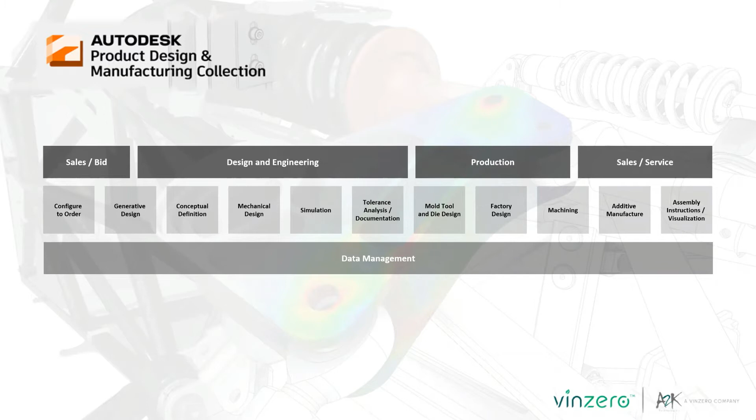So the collection that we're talking about today is what we call the Product Design Manufacturing Collection. And it includes all the tools that you need to develop your ideas, to simulate them and make sure that they work together, to analyze dimensional tolerances, to create CAM toolpaths and strategies, and factory layout options for optimizing throughput, and all the data for all those tools that are used to store and manage that in a secure project. So Autodesk has a whole bunch of tools that fit into this sector, and it's my pleasure to give you some information on each of those today.

So we've got, like we said, areas where we can simulate and analyze dimensional tolerances, things like nesting and CAM functionality. We can also talk for a moment today about factory layouts and some of the things with creating an efficient factory. But best of all with these particular tools is that they're all included in the one collection of products. And we've got quite a list of software that's included here.

Obviously, most of you would be aware that Inventor is the key product of this space, but that also matches into a bunch of other Autodesk applications that link with Inventor to give us some very high-end information and data on the various aspects of working with the Autodesk solutions in the product and manufacturing space.

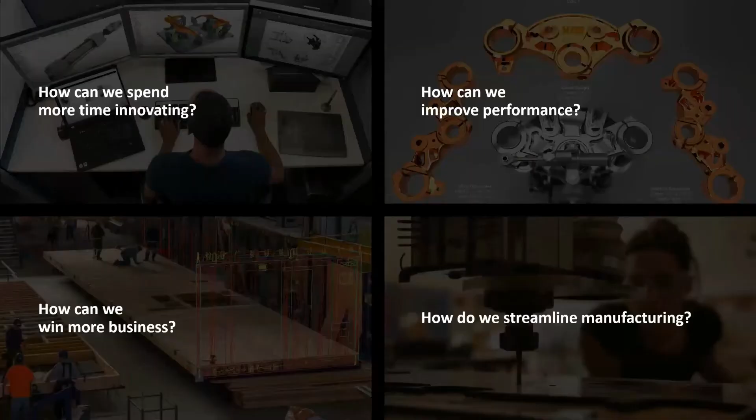So in those capabilities, we can certainly see many applications that are available to us that help us be more innovative. We can win more projects and business. We can streamline manufacturing. We can improve our overall product performance. And we're going to show you today during the presentation some of the reasons why and how we can achieve that.

So first, in regard to your design solutions, we've got a number of options here for when we start out with Inventor. And as you would probably be aware, the general capabilities of Inventor are quite well known, and we certainly run webinars and training on the Inventor product quite frequently here at Vinzero. So I'm going to just quickly brush over a couple of points before we dive into some other elements of the Autodesk Product Design Manufacturing Collection for today's webinar.

So with regard to Inventor, and I'm sure many of you would be aware of a lot of what Inventor does, but it certainly enables the designer, maybe yourself or the engineer, to focus on the design, less on how to use feature controls, but more on the concepts and the power of the design that you've got. So because we're going to find specialized modeling tools, we can speed up our design and integrate things like sheet metal tools into our product design. And those are, of course, available for us as a feature of the Inventor default system. These are not extra add-ons that you're having to purchase.

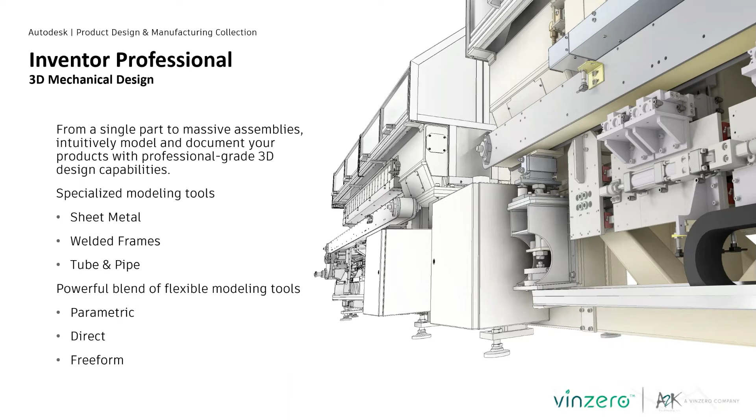Another very powerful aspect of Inventor is what we call iLogic. iLogic is a very, very powerful system where we can set up rules which control the way that our design is going to behave. It's a very interesting and powerful system to allow us to reduce repetitive tasks. We can obviously make minor changes, or major changes for that matter, to our design to create items that are directed by certain parameters, and we can then build that in.

In Inventor 2023, we've seen a number of nice little enhancements to this area, where we can save out our rules to a menu system and make good use of them. So even for generating quotes and things like that, if you've got a conveyor system, as you can see there on screen, we can very quickly animate or sequence that conveyor system up, and we're able to get our data out more quickly from our design and apply a rule to that particular system.

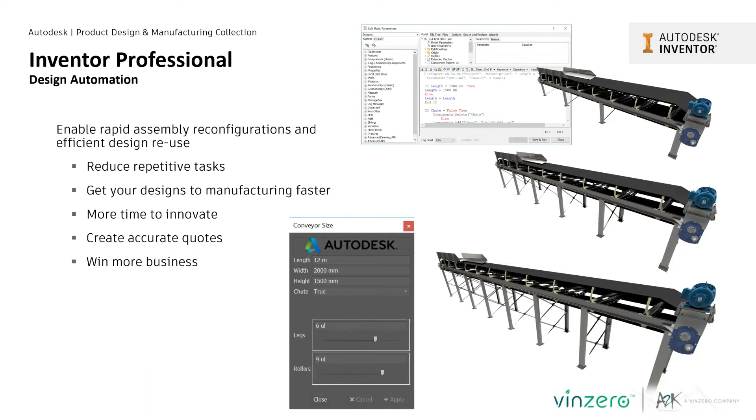One of the other things Autodesk have included over the last number of years is, in the interoperability situation, obviously working with data from other CAD systems. This has always been a hurdle for many companies. If you talk to any engineer, when it comes to sharing information from one CAD system to another, we lose all sorts of information. But nowadays, Autodesk have created a part of Inventor software called AnyCAD, which is a very, very powerful little tool that basically reads in data from a range of different CAD systems and gives us the option to be able to work with multiple CAD systems, even being able to maintain an associative link to, for instance, a CATIA design or a design from another system.

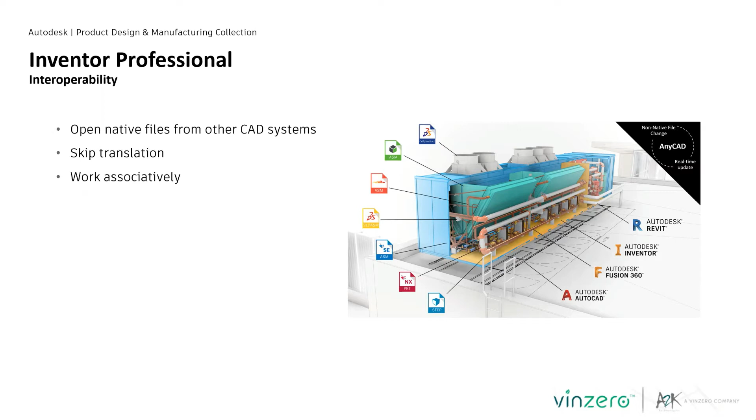So if we update the native CATIA design, Inventor can react to that and obviously allow us to see that update progress through the system. So quite a powerful little tool worth exploring is the AnyCAD functionality. Basically, as soon as you open any one of these models from another CAD vendor, you'll get prompts as to what you would like to include inside of your design functionality.

Something else that's grown quite a lot over the last number of releases is what we call BIM interoperability. This is a very powerful part of the Inventor space, allowing us to interact with other elements of software, specifically and particularly for those people who are in the architectural space using Autodesk Revit. Very, very powerful functionality now to be able to collaborate with architects and to allow those custom options and items to be inserted into a building design, and we can then use those quite easily to create and export out of Inventor as an IFC or an RFA file for use within the Revit space.

So we can quite quickly simplify the model. Obviously, as you'd be aware, an architect probably isn't really concerned about what's inside the air conditioning system, as you can see on screen there. All he's really interested in is the details, maybe the vent outlet, inlet positions, etc., where the services connect in.

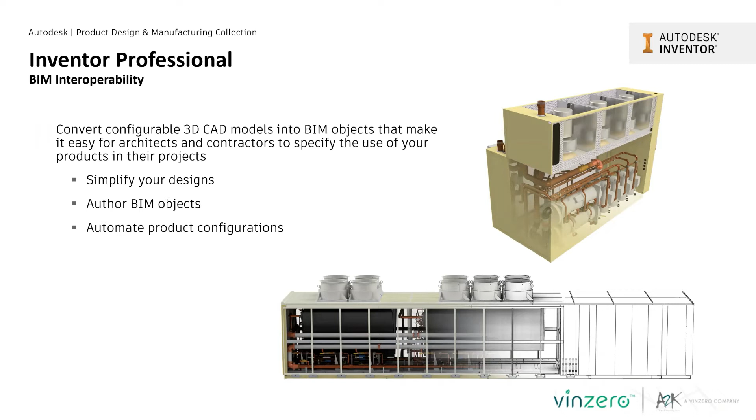But in Inventor, we obviously would have all of the manufacturing details, so we can simplify or dumb down our model. These can be used quite cleverly within the Inventor and Revit space in that fashion.

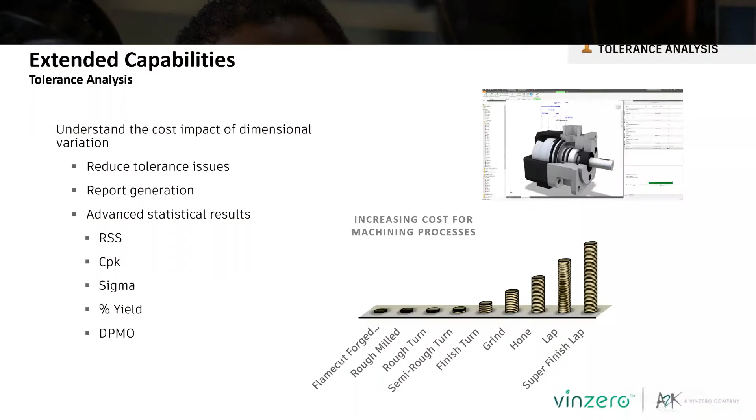So yeah, quite a handy functionality that we're seeing a lot more development on. Let's talk about some of the integrated tools. Again, all of these tools are part of the Product Design Manufacturing Collection, which we call extended capabilities of the Inventor tool. First up, I'd like to talk to you a little bit about tolerance analysis.

Now, for anybody that's been involved in the manufacturing space, you'd be well aware of the extra cost involved in creating, for instance, a super finished lapped part compared with something that's flame cut. There are extra manufacturing processes that need to take place, and that will impact on the cost and quality of your design. So the big question is, how much time and money are we spending unnecessarily creating high quality finishes when maybe the customer isn't really needing that particular functionality?

So really the purpose of the tolerance analysis tool is to show where we need to have high tolerance items, and we can stack those tolerances up and analyze all of that within our 3D model space to consider best fit, function, and form. We've got quite an important aspect here, and I'll come back to this one and talk a little more on it in a later slide as we work through today's presentation.

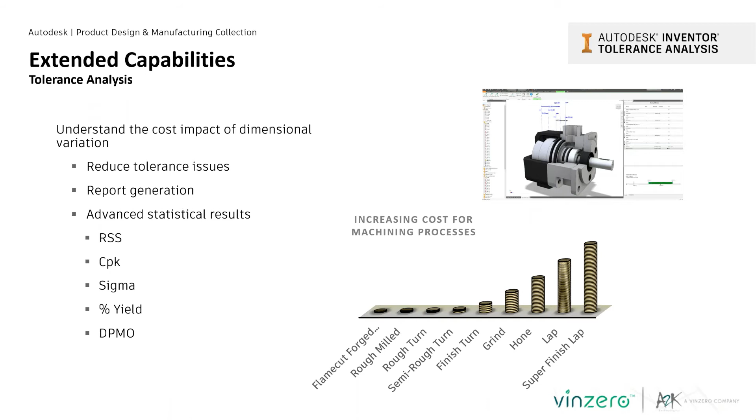With regard to factory layouts, this is another aspect of the Product Design Manufacturing Collection that links into Inventor. We have done webinars on this particular subject specifically, and if you're interested in this aspect of factory design, it's certainly worth having a look at those particular webinars. I'll explain a little later on where you can get access to those.

Basically with the factory design tool, we've got an option where we can bring in from a very large library of standard components. So things like conveyors and basically anything for product movement, we can save out and create an asset library which lives inside of the Inventor system, and we can simply pull in conveyors and product movement modules to allow us to set up basically a map of where our part is going to travel through a production type scenario. Then we can analyze the physical aspects of that and the associated costs of each of those production scenarios. So there's quite a lot of benefit in doing this.

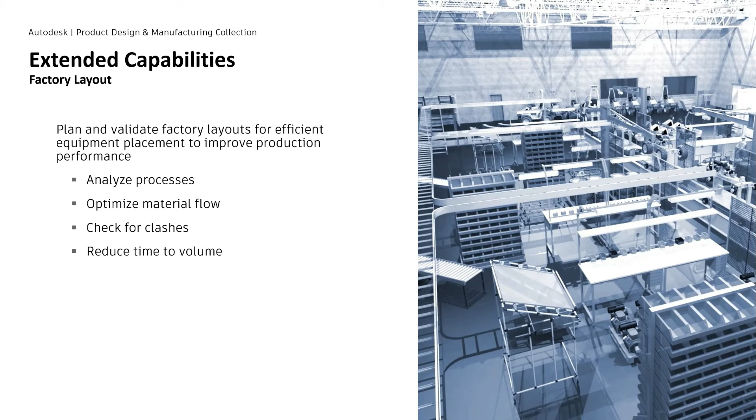Certainly having a great design, we need to be able to produce that part and have it come through a production environment, and we can do some further analysis on that within the Inventor factory layout or factory design utility.

We've also got options for things like stress analysis, and most of you would be aware that many of today's 3D CAD packages include some sort of entry-level FEA, finite element analysis tools, and lots of people use these, which is great. But every license of Inventor Professional has a standard stress analysis for standard stress and frequency studies. Also within that, if we have the Product Design Manufacturing Collection, you get access to what's called Autodesk Inventor Nastran.

And that offers a more complete set of simulation studies, so we can do nonlinear, thermal, fatigue, and dynamic studies. They all offer a complete understanding of your product performance and the accurate results that you need from that particular product. Really what makes them so powerful is that all of the calculations here are using the Nastran solver, which if you know anything about FEA, is quite a powerful solver that is owned by Autodesk.

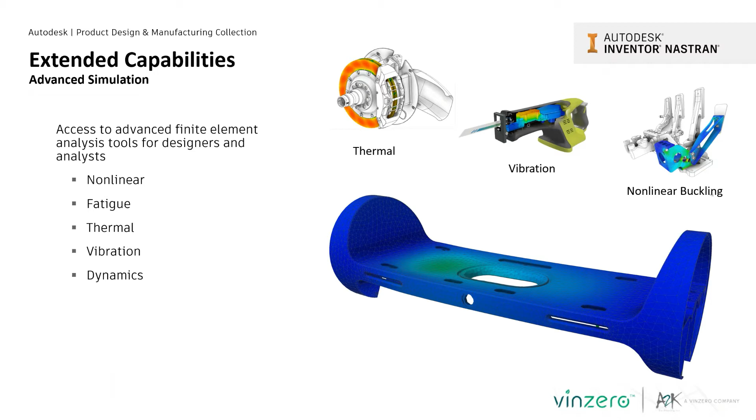Another really powerful part of the Product Design Manufacturing Collection is what we call Inventor CAM. This is an area that I've been quite involved with over the years, and it provides for us a seamless workflow from design through to manufacture. Because it's integrated into Inventor, it means that the changes that you make to your Inventor model will reflect instantly in your toolpath and CAM processes.

Now, this has always been a challenge for people using CAM software, in that when a change is made to the parent model, generally they would have to re-import the parent model and go through and reprocess their CAM toolpaths. With Inventor, it simply pops up with a little message box saying your model has changed, would you like the toolpath to reflect that change? If you pick yes, the system goes off and rebuilds the CAM toolpaths according to the change to those models. So, quite a powerful tool that gives us a lot of options for working with connected designs.

And again, a lot of what we're talking about today is about reducing what's commonly referred to in the industry as silos of information, where we end up with one person doing the CAM system and another person doing the 3D design. Basically, these are all rolled into the one software if you're using Autodesk's Product Design Manufacturing Collection.

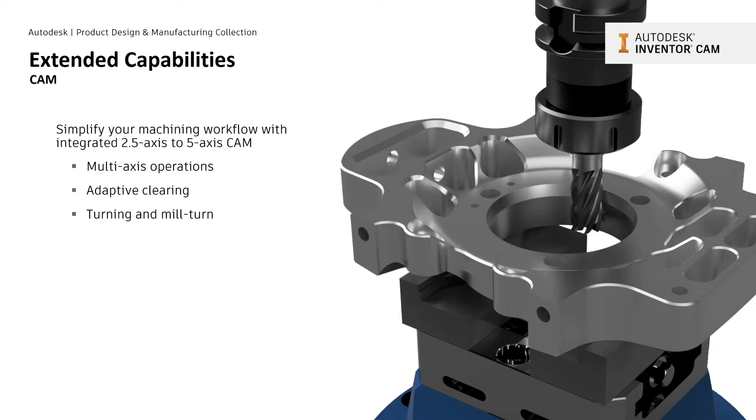Moving forward, the next functionality I'd like to talk about is the nesting function. This is a system that links into your Inventor software, presenting as another tab along the top of Inventor, where you can run a nesting analysis by saying I want 10 of these brackets, 5 of those brackets, and 3 of those brackets.

What the nesting software will do is look at the thickness of each of those brackets or items you're requesting. It will then lay them out onto whatever sheet size you specify, in the most productive way to optimize your material usage from that sized sheet. So nesting studies are very powerful, and we can export that straight out to a laser, plasma, or profile cutter to create toolpaths that give us the best utilization of our raw material sheet.

This is a fairly new tool, released about 4 or 5 years ago with regard to nesting. It's all linked in with your Inventor model, so if your Inventor model changes, you'll get a message in the nesting software saying this profile has changed, would you like me to rerun the nest? Very powerful functionality that we can utilize within Inventor's menu system.

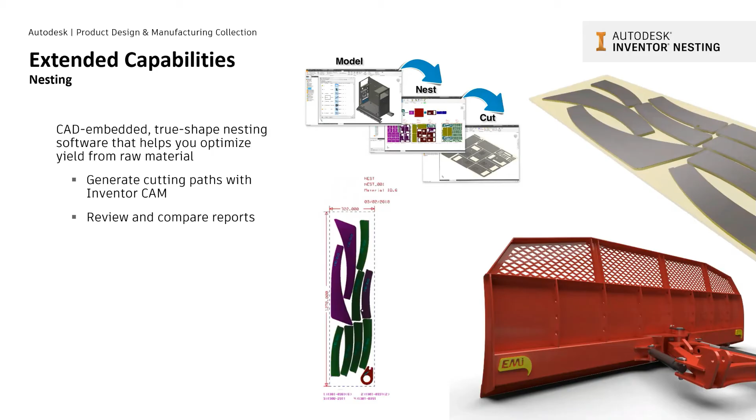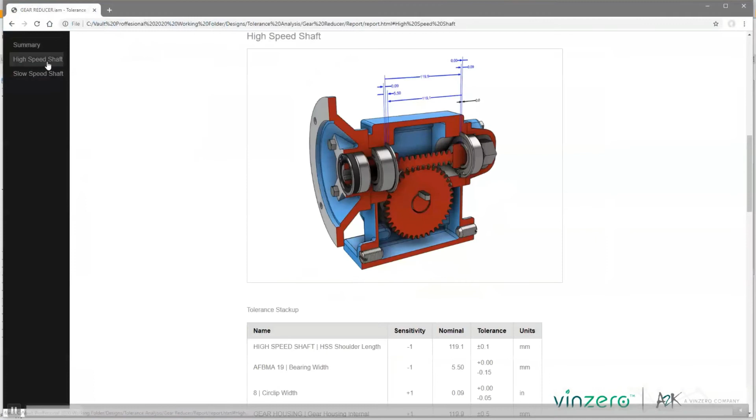Just back to one of the items I talked about before, and mentioned we would come back to this, I want to talk for a moment about tolerance analysis. Tolerance analysis inside of Inventor is very powerful. Simply put, it allows you to make trade-offs between manufacturing and assembly tolerances to reduce costs, while ensuring you've got a correct fit for your particular gearbox or whatever it is that you design.

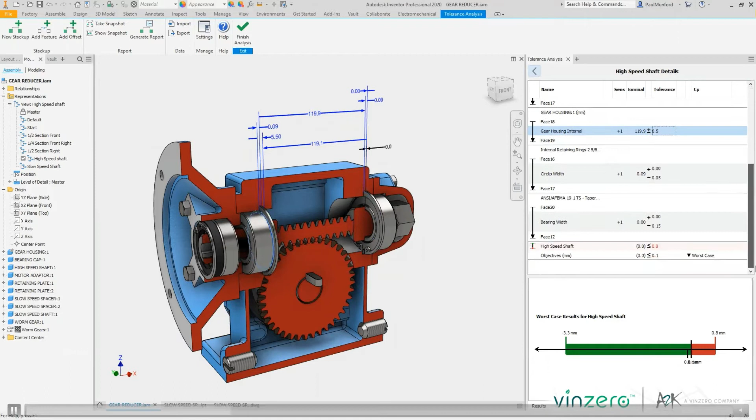If you've ever had to do this manually with a spreadsheet, you'll know it's very time consuming. It's not an easy function, and it's quite often prone to errors and challenges as you work through design. But the best part of tolerance analysis is that it's built directly into the Inventor user interface. We can check stack up of tolerance capabilities and relationships defined in the assembly model, and it calculates the cumulative effect of the geometric dimensions and tolerances included in the stack up.

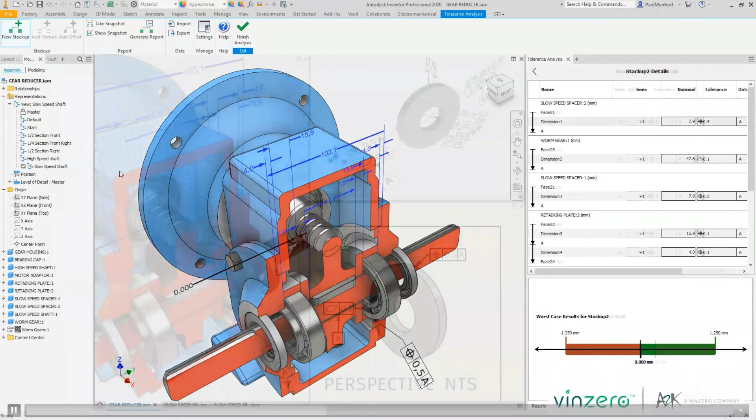Tolerance analysis associatively reads the tolerance values you've already specified when you applied the 3D annotation to your model to create model-based definitions, including geometric dimension and tolerancing. Tolerance values can be evaluated and edited directly inside the tolerance analysis panel, and any updates automatically stay in sync with your existing 3D annotation and GD&T.

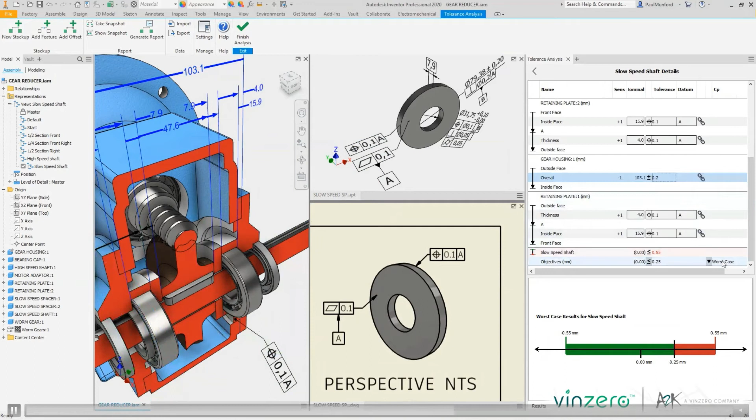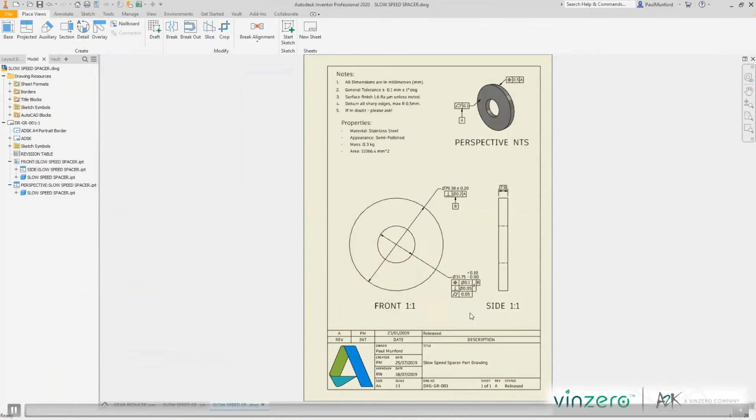Tolerance analysis helps you understand how contributing tolerances impact each of the stack up loops, and we can calculate and view that as a worst case scenario and output statistical information in relation to how that behaves. So if you're not already doing 3D annotation and GD&T, have a go at it. It's a very powerful tool that will leverage your existing design information and show you how those tolerance analyses can be considered.

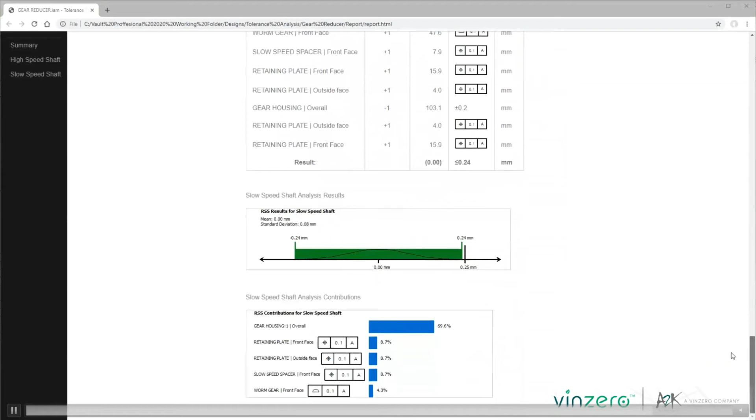These tools allow us to save time in manufacturing by machining parts at a lower, acceptable tolerance. It reduces costs over tolerance components and ensures, as we've said, correct fit and function for the final design. Very powerful tools that I'd certainly encourage you to explore and take a look at.

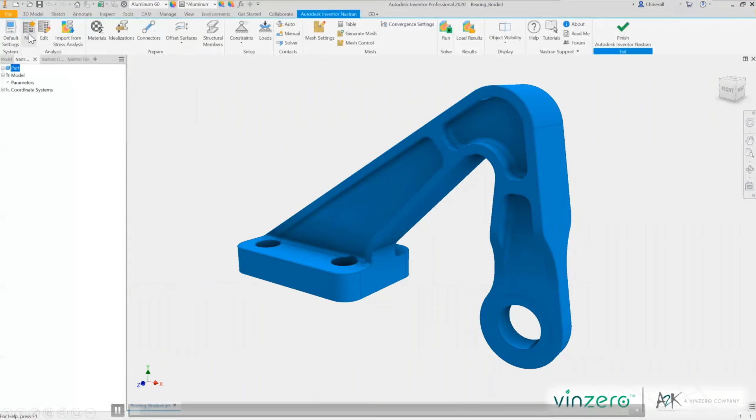As we mentioned before, just like tolerance analysis, Inventor Nastran is built directly into the user interface also. So setting up an analysis is easy. You're going to start out by choosing the type of analysis that you want, then we apply a material to that, setting up whatever material we'd like from the library.

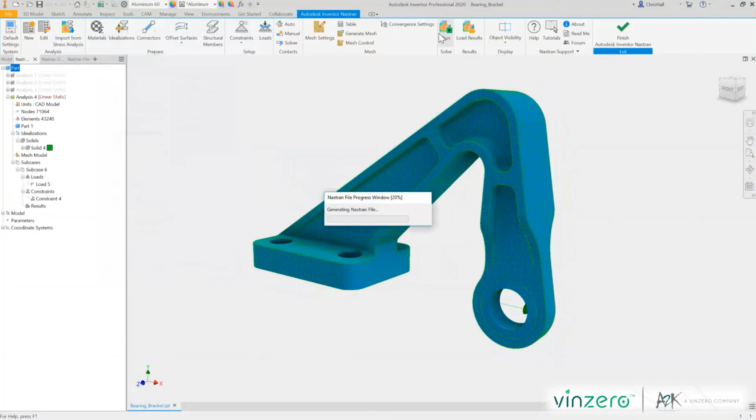Now we can define our mesh settings, where we can stipulate the mesh size and look at how those items are going to function. These are really the two most important pieces of information when it comes to running analysis. We then set up a series of constraints, basically where we're going to bolt that part down, and effectively the real world conditions are applied to that component. Once these are all set up, we can run our simulation.

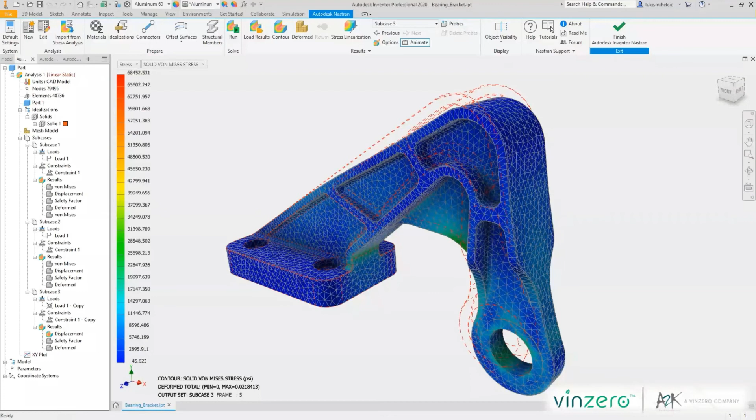After the simulation is complete, we can inspect the results in a number of ways with color plots or animations. We can look at minimum and maximum values and other items. The really cool part is that when we make a design change, in this case adding that center rib, we can see the impact that will have on our part or component. All of that setup carries over to run an updated simulation of the new geometry, giving a very good comparison of one design to the next. Again, an integrated tool built into Inventor, so we can do fairly high-end analysis on our componentry for the production side of things.

This space has been growing a lot over the last number of years. We're finding a lot more integration, and as I mentioned previously, with BIM and interacting with Revit and the likes of those tools, there's a bunch of options with regard to working with connected design, as we call it. So whilst 3D CAD software provides and encourages you to move from 2D to 3D, that is true—there are many benefits of a 3D workspace.

However, in some scenarios you may find that using some elements of 2D are still valuable for your particular situation. Things like electrical schematics are best done in a 2D environment. There's some aspects of manufacturing that still lend themselves to a 2D space, but why not interconnect that? Why not link that up with your 3D model so we can use elements of our 3D space and elements of our 2D space to delve in greater detail into how these can interact together.

A couple of other things about connected design—most of you would have heard of a product called Navisworks, a very powerful system for doing clash detections and a number of other areas. Basically, the purpose of Navisworks is to manage large designs and items that might have thousands or millions of components. But Navisworks is a very powerful tool for doing things like clash management and walkthroughs and fly-throughs. We can do a lot of design review in the Navisworks system, but that links up with our Inventor system to allow us to work with those particular items.

Things like simulation of a factory layout as your part moves through its production life cycle—we can see the part travel and move into particular environments. Maybe a part spends 4 hours in this particular area having so many processes applied to it, and then we can move it on to the next cell or whatever it might be for the production functionality.

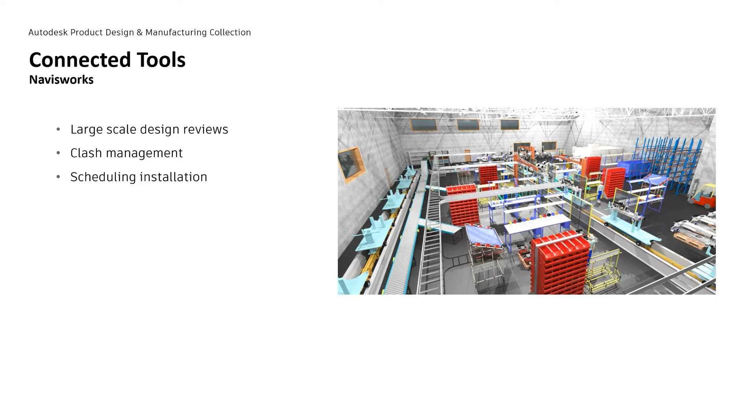I did mention schematic design before, and there's some very powerful things going on in the electrical space. Inventor does have a cable and harness system, which you may or may not be aware of, but collaborating between mechanical and electrical teams can be a challenge sometimes—there's no doubt about that. So being able to work with electrical and mechanical designs, we can actually get them to talk to each other.

AutoCAD Electrical can actually link up with what we call the electromechanical link to Inventor. So we can share 3D models and live links between those particular applications, giving very powerful functionality working between not only the 3D modeling processes you would normally have within Inventor, but also for analyzing your electrical details and creating your schematics. They remain in sync with each other—there's a live link between, for instance, AutoCAD Electrical and Inventor if we wish to use this electromechanical design link. A very powerful tool that, if you're using AutoCAD Electrical or Inventor and doing electrical design, is certainly worth exploring.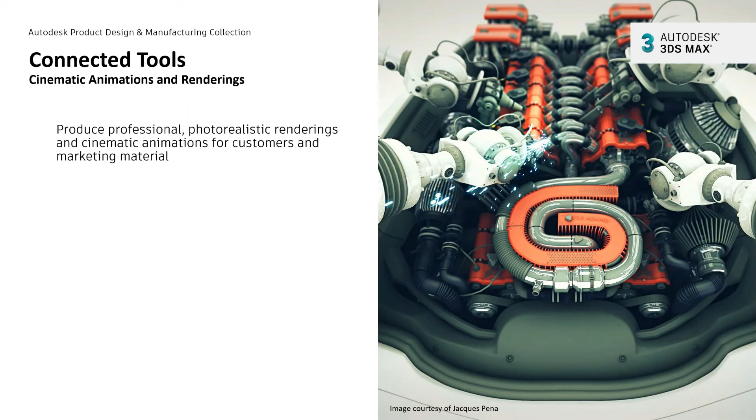3D Studio Max is included in the product design collection, and you can certainly use it to create some very realistic marketing information and other details to make your products look amazing in front of your clients. We'll go back to this one a little later on as well. That's another area I'd like to talk about.

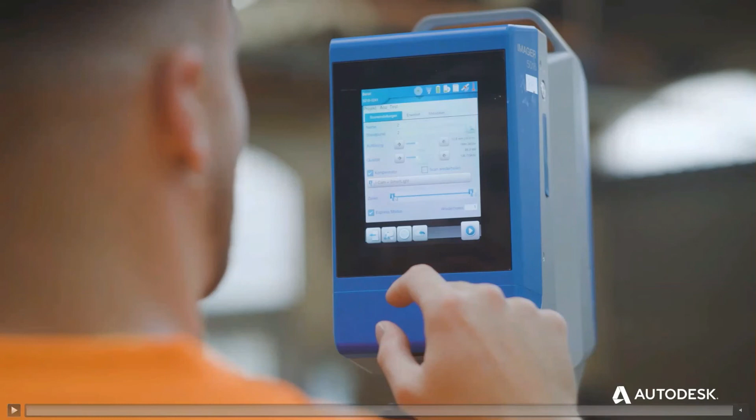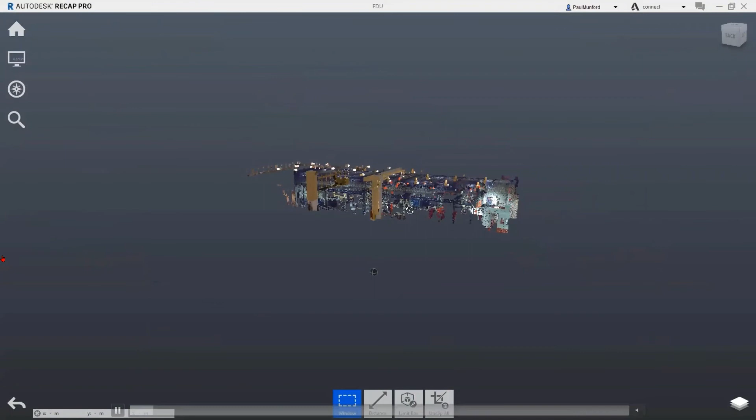One of the other things that's grown quite a lot over the last number of years is using point clouds to create different details and scans of areas. You might be a building owner and want to make sure that your new equipment coming into this new property is going to fit correctly and function properly. There's a lot we can do in this space by working with point clouds.

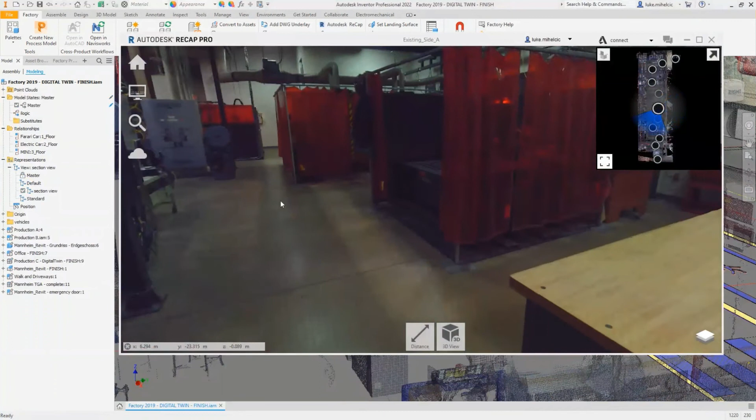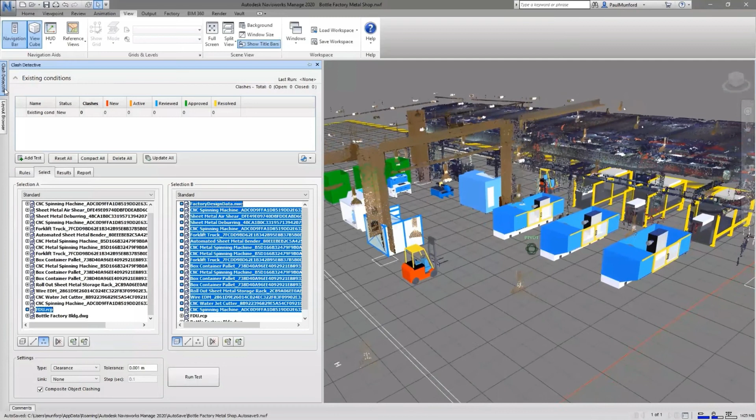You'll see more and more of this as time goes on, because we can scan a building and use different points from that scan to create information for working within the system. If you've not looked at this, there's some really clever tools within not only Navisworks but also a product called Recap for working with scan data. We can then link and import that into Inventor or AutoCAD or whatever software you're using to work with your complete 3D design.

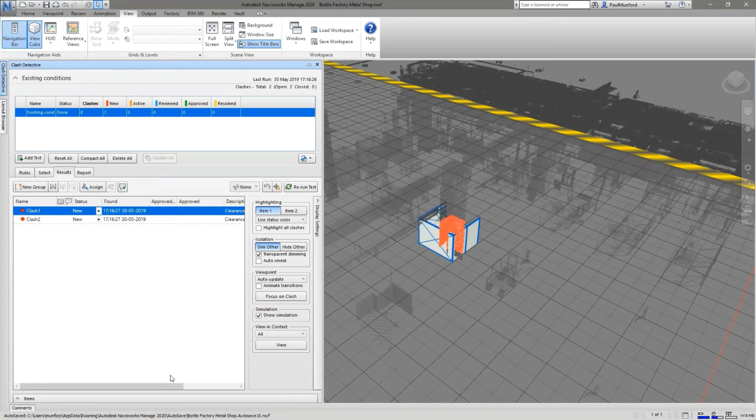One of the big benefits of this is we can very quickly and easily see in real time how particular work cells might fit into a factory or whatever it is you're designing. We can work with those 2D and 3D layouts with our point clouds to see if we're going to physically be able to fit those particular details into your workspace.

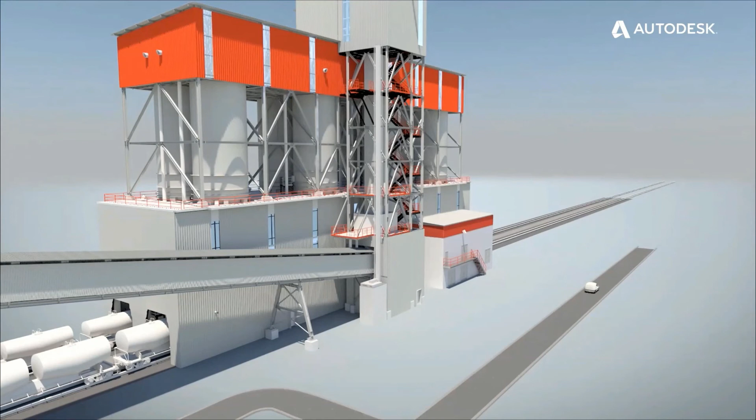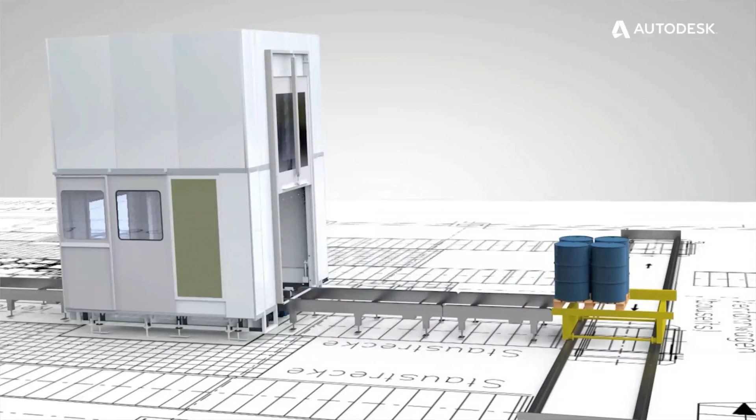Just one other little slide, this one related again to 3D Studio Max, which I mentioned earlier. Again, a very, very powerful system that allows us to work with realistic renderings and some very powerful tools that let us use cinematic quality to create workflows within a factory, for instance, or to utilize different information. So again, connecting our Inventor data with our marketing information, or information about maybe a factory layout or something we've done to that extent.

With regard to Fusion, many of you would already be aware of what Fusion does and how it functions, but there's been some really nice design developments and interactions in the Inventor and Fusion space, particularly in the 2023 release of both of these softwares. There's been some really fantastic little tools available to us now.

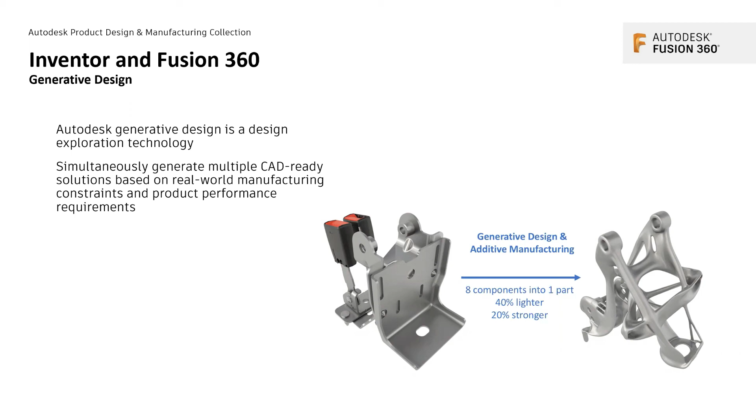Okay, with regard to CAM, just to talk about a couple of other elements of this - there's plenty of times when we do need to still use subtractive manufacturing. When we talk about additive manufacturing, we're talking about 3D printing. Subtractive manufacturing is traditional manufacturing methods where we get a block of steel and machine segments of that away to create our required part.

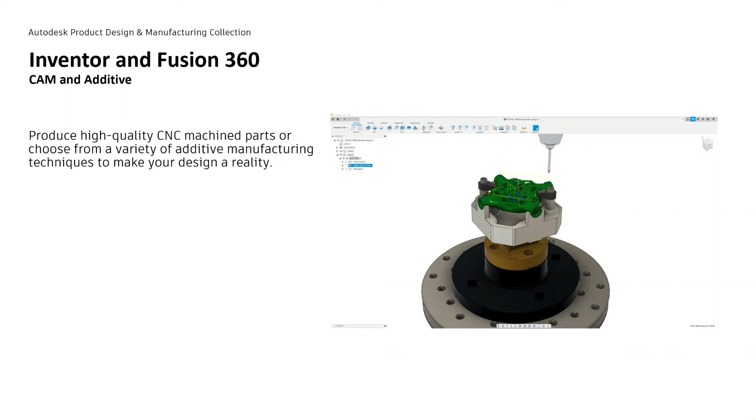Fusion and Inventor both have the functionality to do either of these, whether we want a quick prototype on a desktop printer or whether we're ready to machine a part on a CNC machine. We can do both in the same application, with good interactivity between the 3D print space and going off into the CNC space, looking at profile cutting, machining, milling, mill-turn machines, and other machining functions within both Fusion and Inventor.

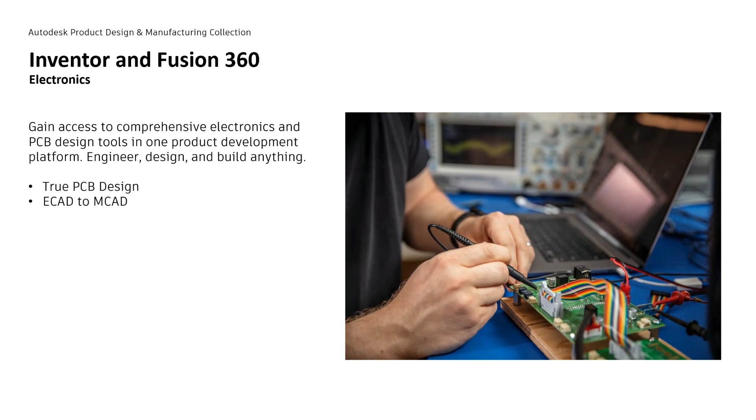Fusion also has a very nice feature that lets us design electronic PCBs and work with those. You may be aware of the electronic system within Fusion 360 - it's quite a powerful tool, not something available in Inventor at this point, but in time we'll likely see those options included there too. It's a nice tool that enables us to design a printed circuit board while working within Fusion.

With regard to interacting and working with Fusion, there's quite a lot of linkages now, and I had hoped to give you a live demonstration. Inside Inventor, we've got a whole bunch of tools now where we can work with Inventor to send our model directly out to Fusion. I'll quickly fire up my Inventor and show you this - I think it's quite a powerful tool that allows us to work with interactions with a Fusion system.

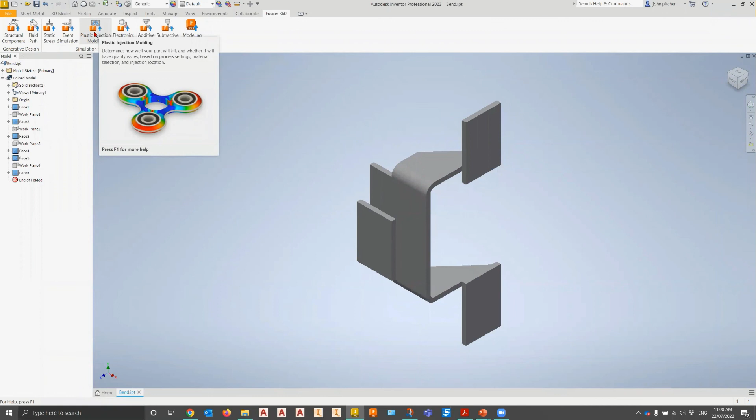Inside Inventor 2023, which I've just fired up here, we've got this new tab where we can connect our design directly with an element of Fusion, whether additive or subtractive manufacturing. You can link your Inventor model directly back to Fusion for a whole bunch of different options - for example, plastic injection molding can link into the system for that. It's quite a powerful tool for working with this.

When we open up any one of these, say I want to load this into Fusion's subtractive manufacturing environment, we can go in here. This will allow us to upload to our Fusion cloud storage space and work with that particular item. It's quite a powerful tool that now links Inventor and Fusion together, and we can utilize that for working with that particular design.

So what this will do is send this particular part I've got in my Inventor up to my cloud storage inside Inventor and Fusion, and allow me to create some CAM files or whatever else is linked into the system for working with each of those items. Very powerful functionality, well worth exploring if you're using Fusion CAM at the moment, which a lot of people have been doing over the last years because of the ease of use and great functionality within Fusion. Just another option to link your Fusion and Inventor systems together.